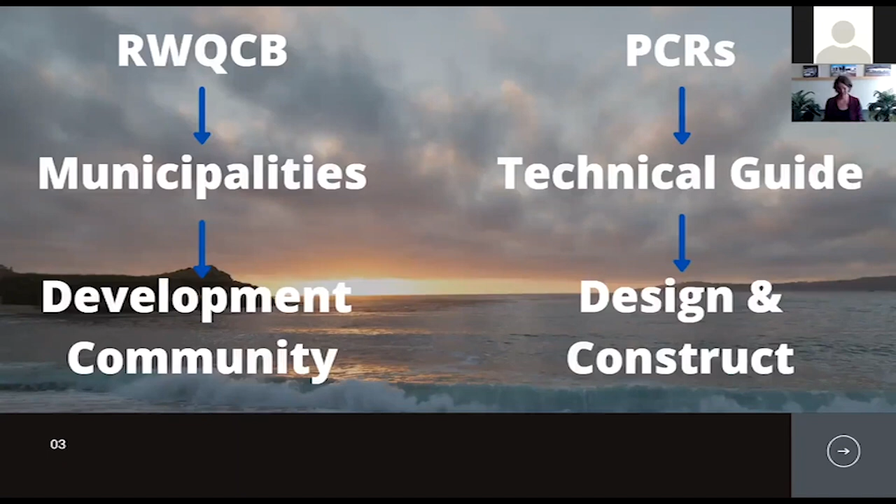So where your project is located is one of the first things you need to think about. If you are within what is called an MS4 permit boundary, that's the municipal stormwater permit boundary, within the Central Coast region, then you will be subject to the PCRs. In general, the MS4 permit boundaries follow urbanized areas as identified through the census. So if you are within city limits, you're very likely to be within an MS4 permit boundary. If you are within an urbanized area of the county, also the same. If you are within a more rural area of an unincorporated county, or if you have any likelihood that you may be outside of an MS4 permit boundary, you should definitely confirm that you are in or out.

It's also important to understand that there are other types of MS4 permit holders. Probably the one that you will encounter the most through design is Caltrans. So Caltrans is a statewide agency. They have their own MS4 permit that applies statewide. Within their right-of-way, their MS4 permit boundary, they have a separate set of post-construction requirements that they have adopted through their individual stormwater permit. So as an example, I worked on a project that was both within and outside of the Caltrans right-of-way. In that situation, you would be applying the Caltrans post-construction requirements within their MS4 limits, their right-of-way, and then you would be applying the local municipality's Central Coast PCRs within their MS4 permit. So it's important to understand where those limits are.

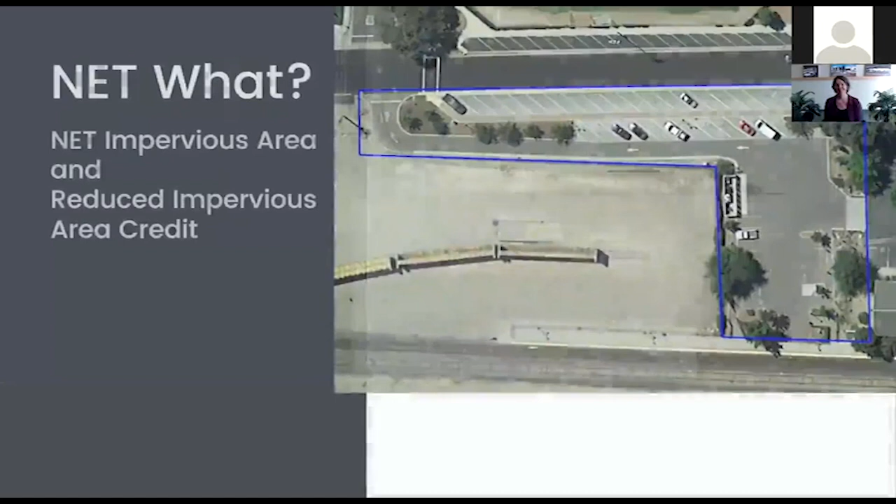So what is net impervious area? The concept of net impervious area, and correspondingly a reduced impervious area credit, was developed by the regional board as an incentive for redevelopment projects to reduce the amount of impervious surface. Meaning that if you had a site that was, say, fully paved, lot line to lot line, and you reduce that impervious surface through your redevelopment, you would then achieve a credit. So how does this work?

On the screen is an example of a site where we did just this. This was a smaller project. It was a city-owned parking lot, and it was really important for the city to maximize the amount of parking spaces on this lot because it's adjacent to an Amtrak train station, and on the other side of the street is also a ball field, and they get a lot of parking during games. So the city needed to maximize parking, but they also wanted to minimize their effort in compliance with the PCRs.

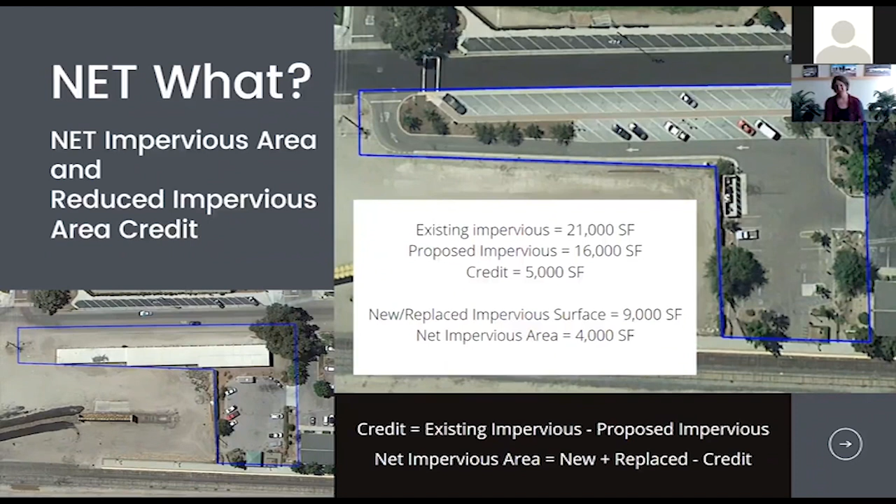We're not expecting that the preliminary stormwater control plan would provide construction-level details for every facility. But you need to show that you have enough room on your project site to comply. And certainly work with your permitting agency to confirm that the amount of information, the level of detail in your preliminary stormwater control plan, is adequate. Now, when you're in final engineering and going for your building permit, you will submit a final stormwater control plan. The final stormwater control plan needs to include detailed calculations for every stormwater facility on your project site. And most importantly, it needs to correspond to your construction documents.

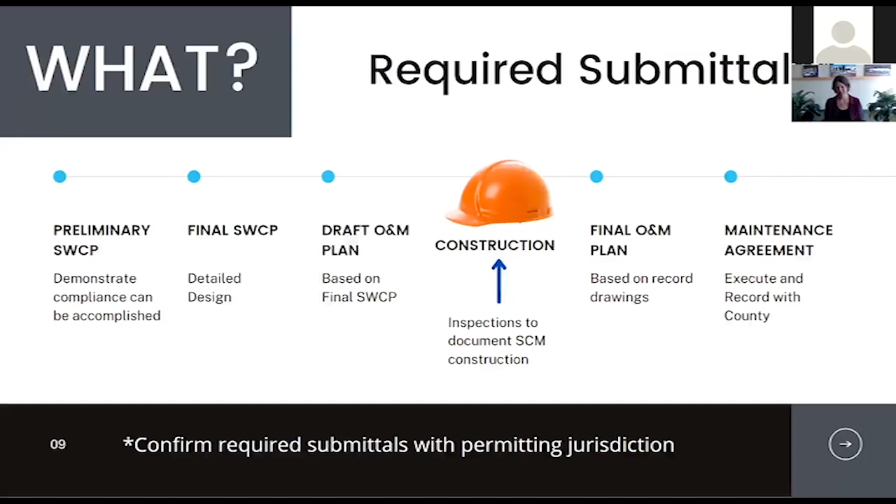So let's talk a little bit more about the O&M plan and the maintenance agreement, because this is definitely an area where the permitting agencies are seeing some discrepancies of what's required versus what is submitted. So first off is that certification of construction by the engineer of record, and that's the inspection during construction that I had talked about.

Your final O&M plan, again, is based on your record drawings. And the PCRs identify 3 minimum components that your O&M plan needs to include. First off is your O&M procedures. What, when, and how are you going to maintain your stormwater measures? And you also need to include the anticipated cost, the annual cost for this O&M. And you need to include a site plan.

Now, the final O&M plan is going to be an attachment to your maintenance agreement. Remember, that's your legal agreement. And that full package, your maintenance agreement and your final O&M plan, is going to be recorded with your county assessor. So the county assessor has specific requirements of documents that need to be recorded. They need to be able to be duplicated with a common printer, and they need to be black and white. So in general, you want all of your pages to be 8.5 by 11.

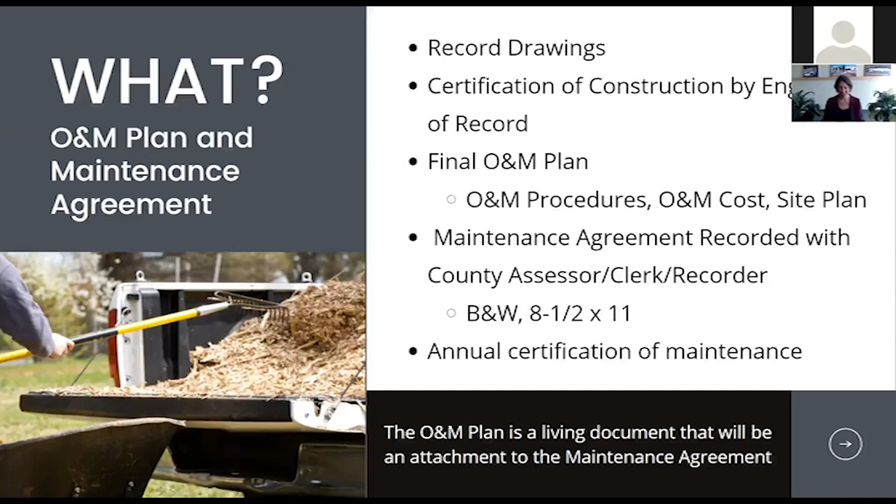So now we're going to talk about how to comply with the PCRs. This is where we'll spend the bulk of our time today, and this is also where we'll be answering some questions that have already been submitted by attendees of today's training. So thank you to those who submitted questions in advance. And again, we will be reserving a good chunk of time at the end for Q&A.

So the most important thing you can do for a successful submittal is to follow the technical guide. So thinking back to our hierarchy, the technical guide was developed by the municipalities as a tool for project applicants. The technical guide is intended to streamline your process of design and submittal, and it also helps to streamline the plan check process on the municipality side. So when you're following the technical guide, when you're using the templates, they know what to expect when they're doing a plan review. And this is going to save you time and money in the long run.

Now, I have to stop and give some kudos to Santa Barbara County. So today, specifically, I'm talking about edits to the technical guide for the MRSWMP group. But the technical guide was originally developed by Santa Barbara County. So this is very similar to what you will see used in Santa Barbara County, and I know that also some municipalities in San Luis Obispo County use this as well. So Kathleen Garnand successfully obtained some grant funding and put together this technical guide a number of years ago with the intention of it being used region-wide, and that's what we're doing now. But keep in mind that the specific changes I'm talking about today apply to the MRSWMP

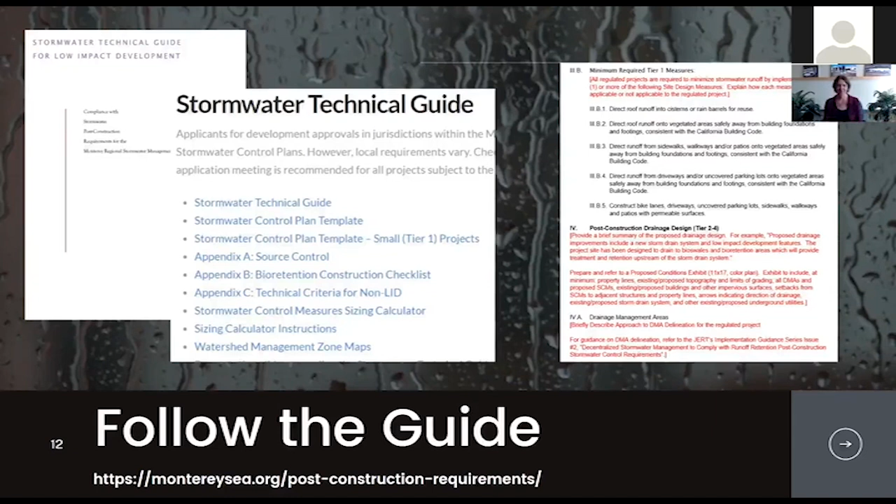One of the other important things that comes along with the guide is a stormwater calculator. So the calculator is an Excel-based spreadsheet, and it will prepare all the calculations you need for Tier 2, that's on-site treatment, and Tier 3, on-site retention. The calculator is based on a bioretention facility. It was designed and developed to calculate volumes for bioretention. It can be used for other types of features, but you may need to adjust or tweak those results a little bit. And if you are designing a flow-through facility, such as a bioswale, you will need to use some other type of calculation or program.

This calculator is based on on-site retention. A couple important things to note is that the calculator does require that you input your project areas by surface type, meaning is it an impervious surface, is it a landscape surface? And so when you're first identifying your drainage areas, you want to try to delineate those by surface type so that you have that ready when you go back to use this calculator.

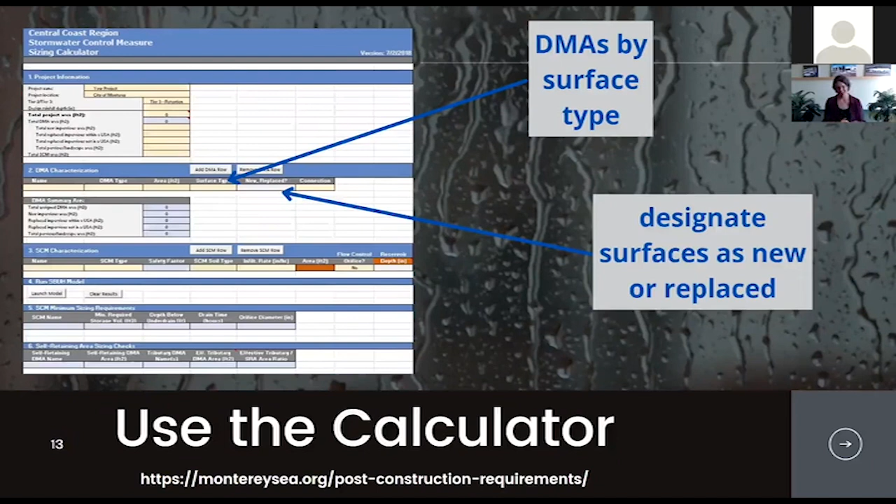The other thing to think about up front is that the calculator requires you to input values, input surfaces, describe them as either new or replaced. And this is important because if you have a replaced surface, the requirements are slightly different than if you have a brand new impervious surface. And again, there have been previous workshops that go into detail on how to use this calculator, and so I'm not doing that today. And there is also a guidance manual on how to use the calculator that's available on MRSWMP's website.

So why is it important to identify surfaces as new or replaced? Well, the PCRs include an adjustment factor for replaced impervious surfaces. And this was meant to help redevelopment projects, knowing that it will likely be more challenging to comply with on-site retention on a redevelopment site, particularly if you're in a built-out area. So that adjustment factor applies for PR3 on-site retention only. And what it is you take your sum of your replaced impervious surfaces and you multiply those by 0.5. You're cutting it down to 1/2.

And that results in 1/2 of the volume that you need to retain for the runoff from those replaced impervious surfaces. And the calculator automatically applies that 0.5 multiplier when you designate a surface as replaced. That's important to understand. You want to put in the full area of your replaced impervious surface. The calculator will apply the 0.5 multiplier for you.

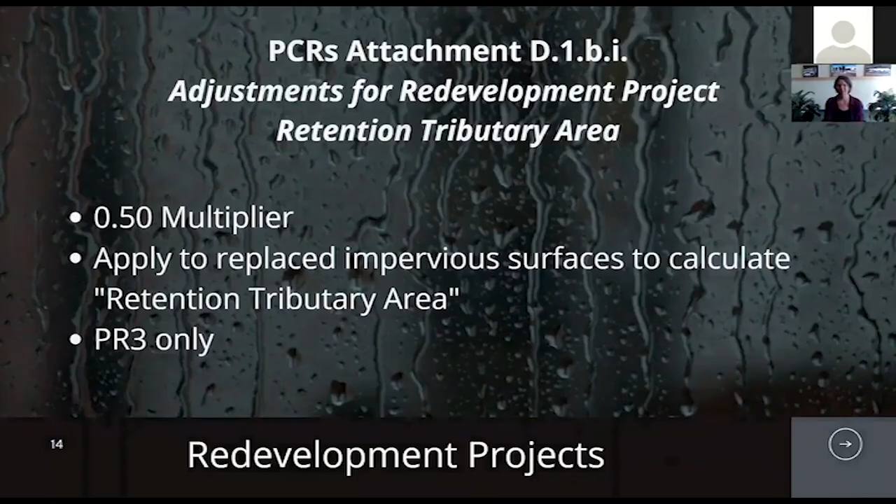Another consideration is how you are going to comply with flood control requirements. This could be the peak flow management of matching 2 through 10 of the PCRs, or you could have flood control requirements from your permitting agency in addition to the PCRs that apply on your project site. If you can use your LID facilities for flood control, it is going to help you comply.

So what you're seeing on the screen is an example of a commercial project, and everything that's shown in the colored DMAs is all new impervious surface. Generally with commercial industrial projects, you have a lot of lot coverage. And what you're seeing in green are the areas that we had available for LID. Each of these green areas were relatively shallow LID basins. It can be a real challenge to meet flood control requirements with shallow, smaller, separate basins.

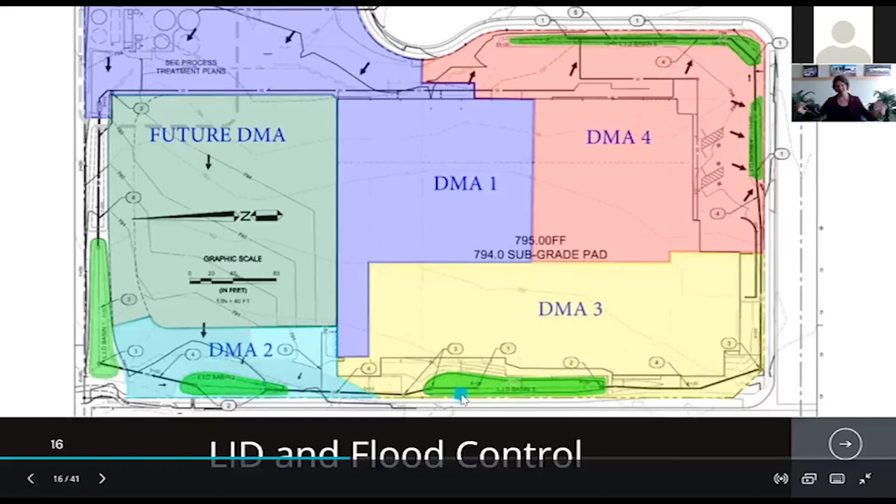And so what we did for this particular project is we connected all of these basins with a storm drain system, so now they act in series. It works well because this site is relatively flat. Everything drains through this basin here, and for flood control purposes, the flow is metered out through this basin. Water can then back up through these storm drain systems and start to fill out these upstream basins. We were also able to take credit for the volume available in those 18-inch storm drain pipes. It's not huge, but it's something. Together, between these discrete basins and our storm drain system, we were able to meet our peak flow management requirements using just our LID facilities.

Now, I'm going to start talking about some specific design features for post-construction compliance. Bioretention is, in general, one of the most commonly used features for compliance. It is what the technical guide will direct you to as a first measure if you need a structural stormwater control measure, and it's also what the calculator is based on. Part of the reason is that bioretention is really reliable.

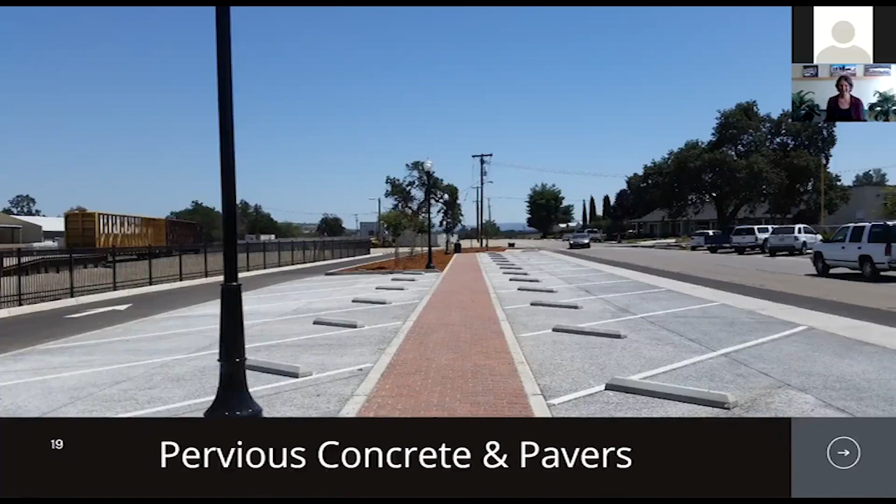This project happens to be the project I used as an example for net impervious area, the parking lot redevelopment project. So all the stalls here were pervious concrete and the walkways were pervious pavers.

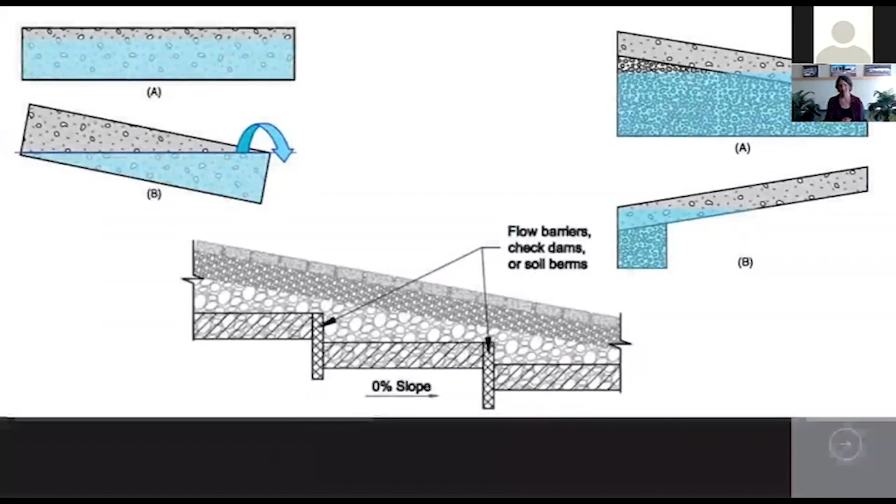So one challenge with pavers and concrete is that in general, our sites are never perfectly flat. If your site is perfectly flat and filled up like a bathtub, you could account for all of that retention volume in your aggregate below your pavers or concrete. Generally, that is not the case. We are going to have some type of slope, and you need to account for this in terms of how much water you can store below those pavers.

So the graphic over on the far right shows a couple options for doing this. You can extend the depth of your base to account for that slope and achieve more retention. If you have a highly sloping site, you could even consider just capturing everything on the downhill side of your pervious concrete if that works for your retention volume.

Another thing to keep in mind is that you may need to include some subsurface check dams. Maybe these are highly compacted native soils. Maybe it's concrete. But you need to ensure the stability of that subgrade as you're storing water below your pervious concrete.

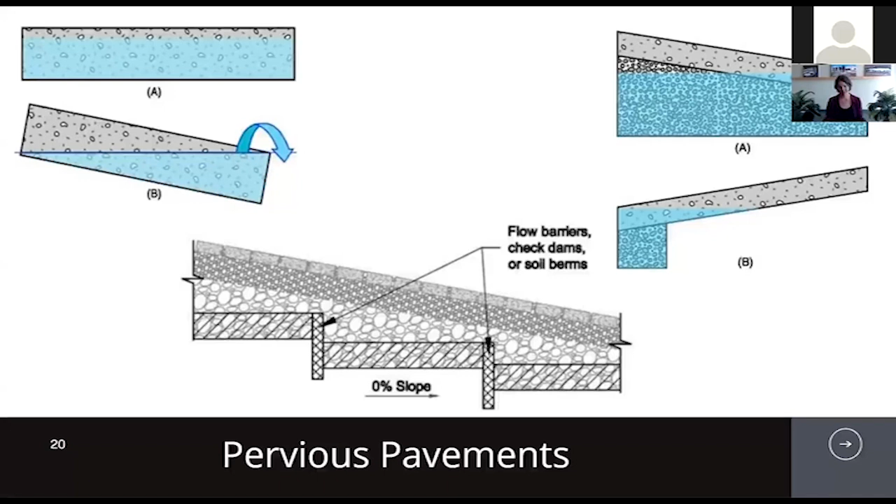That spacing is really critical because ADA requirements dictate the maximum allowable spacing for pavers to be an ADA compliant surface. If your contractor places these pavers such that that spacing is exceeded, now your surface is no longer ADA compliant. So this is really important to have a tight spec and to check in the field. When you're working with pavers, you generally have some more resources available from the manufacturer. So make sure to get all of the manufacturer's recommended specs for both design and construction.

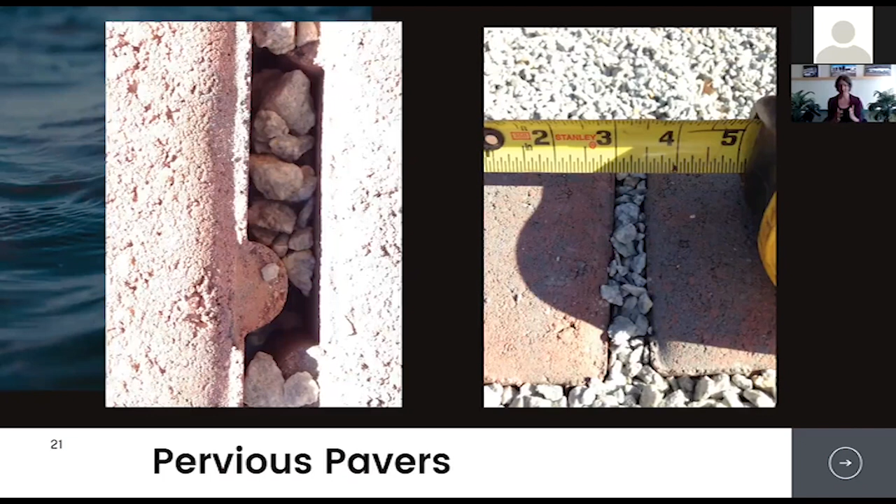Now these pavers again rely on the rock and the area between the pavers to allow for infiltration. And here's an example of what that rock might look like immediately following construction. So it is a challenge to get that aggregate placed into the linear voids between those pavers. And you need to anticipate that there's going to be some maintenance work immediately following construction. You are going to have to clean up that rock following construction and throughout the life of the project. So these types of pavers may need rock to be replaced over time.

If that rock was clogged with, say, sediment, if you had a flood flow that came over and placed mud in those areas, you may have to even go back and vacuum it all out and replace that rock. So this particular material is not a set it and forget it material.

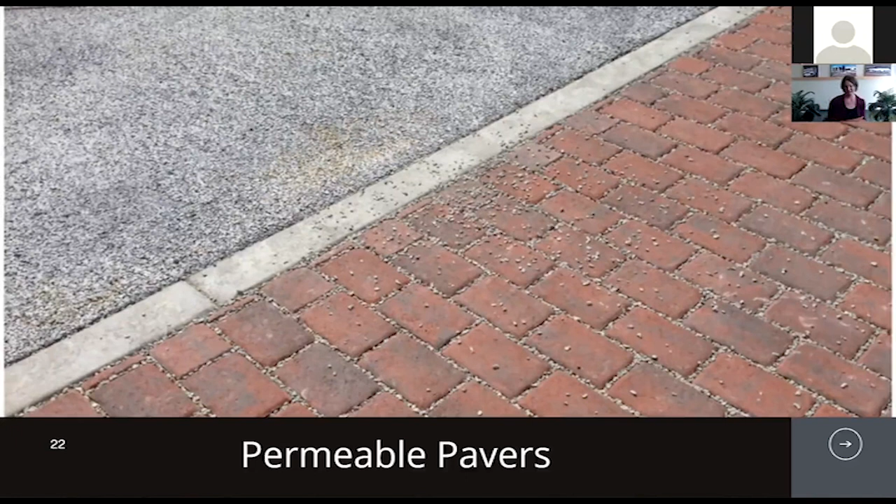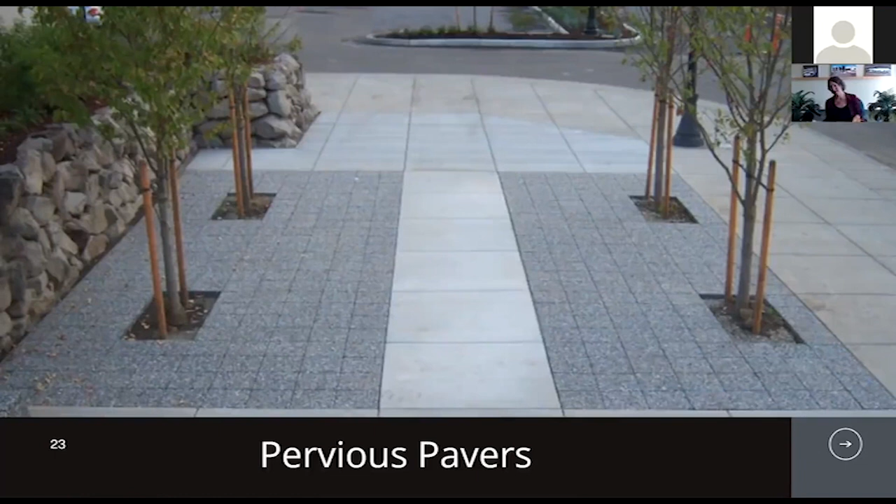So there's no gap between the pavers because, again, the material itself is pervious. And so what you are constructing is a contiguous surface of pervious pavement using a unit block. These are generally a little more expensive up front, but they will very likely minimize your O&M costs in the duration. And they also minimize the chance that something is going to happen during construction.

So this is our first question that came through from one of our attendees today. And the question is, what surfaces are considered pervious or impervious for threshold calculations? So keep in mind the tier that your project is in is dependent on your amount of impervious surface. So understanding up front what is classified as what is really important so that you correctly identify your tier.

The takeaway for this is, is it going to significantly change conditions from pre-development to post-development? And if you have any question on what is considered pervious or impervious, again, please work closely with your permitting agency. The permitting agency is the final authority in terms of approving your stormwater control plan.

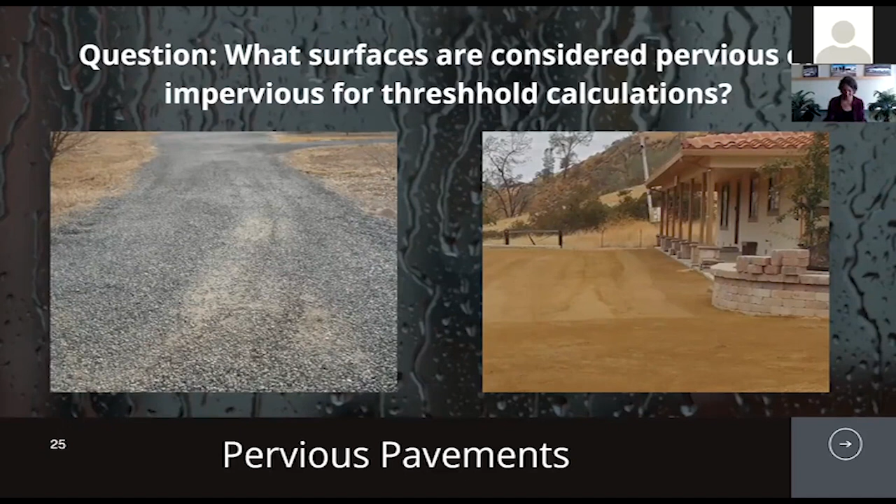So if you submit a stormwater control plan and you get a long laundry list of comments related to things like this, what is pervious, what is impervious, you need to add more detail to your bioretention, whatever it may be, I understand that it's a challenge to comply with these requirements. The permitting agency is really needing to follow the letter of the law because of that potential for an audit, for an NOV. So keep that in mind, right? As you are preparing your stormwater control plan, the PCRs are the regulation. The technical guide helps to get you there. And at the end of the day, it's the permitting agency that's going to be on the hook for that implementation, for that compliance.

All right, so we are going to talk for a while today on infiltration. So infiltration is really, I'll say, a cornerstone of design when you have to account for on-site retention. And I have seen a lot of questions. I have had a lot of questions over the years of implementation.

And, you know, one thing to note in general regarding the technical guide, regarding the PCRs, is that guidance is evolving as we learn more, right? As we construct and place these types of facilities in the ground and observe their performance, we have lessons learned. We have lessons learned through construction. And so a lot of the updates that are coming through the technical guide are based on those lessons learned over the past few years. And certainly we've learned some things about infiltration also.

So the question here is really multiple parts: can you provide some guidance on testing for a surface stormwater control measure, or SCM, as compared to a subsurface stormwater control measure? How do we interpret the test results that we receive from a geotech? What are some factors of safety that we should be considering? How do we manage multiple infiltration rates that were tested on the same site? And are there resources available for when on-site testing is not performed?

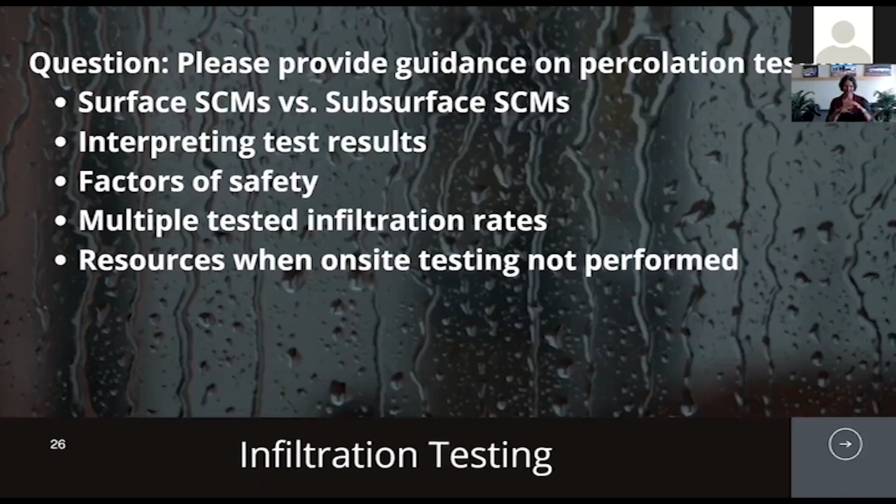So first off, I want to talk about the difference between percolation and infiltration because it's important to understand. Infiltration is the movement of water into the soil. If you have a puddle of water on the ground, it is infiltrating into that soil surface. Percolation is the movement of water through the soil profile. So percolation can occur both horizontally and vertically in all directions once that water is now into the soil profile. The most common type of test that's done in our region is a percolation test.

And Earth Systems did a good job of putting together some guidance on infiltration testing. And it looks something like what's shown here on the screen. This isn't exactly it, but it's close enough for discussion. So when Earth Systems started out in developing this guidance, their goal was to come up with a testing method that could be done utilizing standard equipment that they would generally have for a typical geotechnical on-site study, and also something that wasn't going to take a whole lot of additional time. And what they came up with was a recommendation for a percolation style test.

And what this is, it's a geotechnical boring, and these borings would be conducted across the project site. And a few of those borings would be selected for testing. And the testing would be to place a perforated pipe into that boring, fill that annular space with gravel, now add water until you saturate the soils. And once your soils are saturated, you monitor how quickly that water is dropping, right? What is the rate of drop in that hole? This is a percolation test in that you are subgrade, you're within the soil profile, and you also have water moving in all directions. You have water moving horizontally, you have water moving vertically.

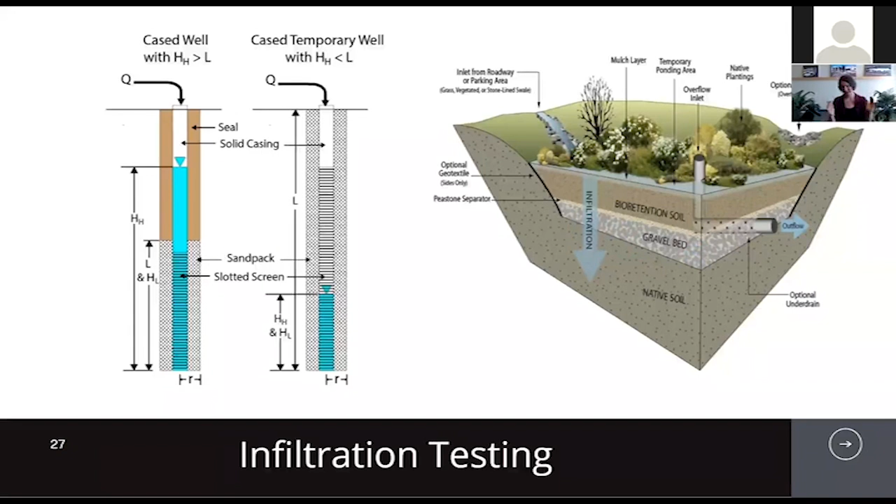Compare that to a typical bioretention. Certainly in our area where we're relying on this gravel bed, this subgrade storage, this is more of a percolation type condition. You're already in that soil profile. However, your typical bioretention facility has much more horizontal area than it does actually vertical sidewalls. So let's take a look at an example of this.

So a typical diameter for a borehole would be 6 inches. And let's say we have 3 feet of standing water in that borehole as your geotech is testing those infiltration rates. You have a sidewall to base ratio of 24, meaning the area available for percolation around the exterior of your borehole is 24 times the area along that 6-inch diameter base.

Now, Earth Systems defined a small-scale stormwater control measure in their guidance. They state that their guidance is intended for use in a small-scale SCM, meaning an SCM where the sidewall percolation provides a significant component of infiltration relative to the bottom of the SCM. So they recognize that this guidance really provides a testing method that would correspond to something like an infiltration trench, something linear in nature, something that relies on likely underground storage through gravel, something that has a lot of sidewall area.

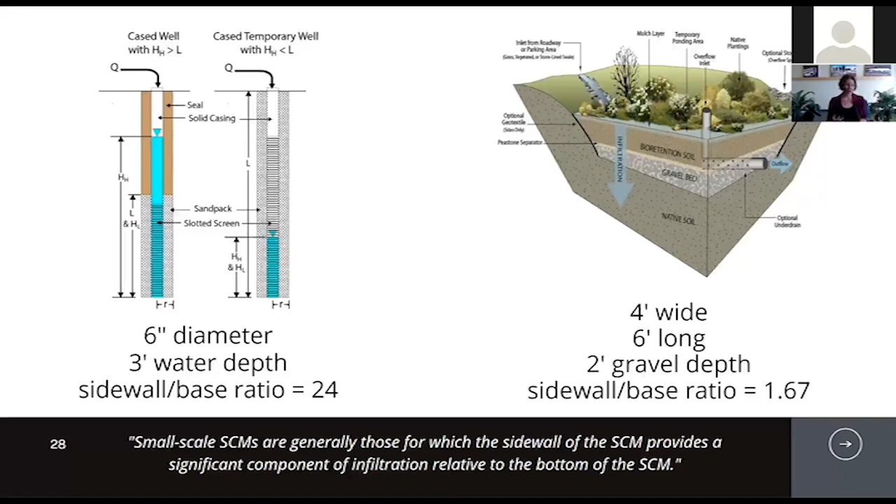So even in the same borehole, in the exact same location, on the same day, you could have different results depending upon how much water you had in that borehole. So what do we do? All is not lost. This is still a completely valid method of testing, but we need to account for this sidewall area through what's called the Porchet method.

So the Porchet method is described in multiple resources. I think the best one that does it is the Riverside County Manual, and there's a reference to that at the end of this presentation. It's also cited in a number of other manuals. The City of Santa Barbara Manual cites it, the San Diego County Manual cites it, the Orange County Manual cites it. What the Porchet method does is it accounts for all of your surface area available for percolation.

It might look like fancy math. At the end of the day, it's just taking into account the height of your standing water, the surface area of your borehole, and basically resulting in what you could consider a unit infiltration rate. And that is the design infiltration rate that you would then apply to your bioretention design. So if you're using a computer program, if you're using the Excel calculator, that calculator is assuming that that infiltration rate occurs over this full surface of your bioretention facility.

If you apply directly your results from a percolation type test, you would be vastly overestimating what could occur here because of that percolation area available in a percolation type test. So this is a very important step. It can result in a significant reduction in a design infiltration rate compared to what's tested. I mean, on the order of magnitude of 10 or more. I've seen 20, I've seen 30 times reduction in what is an appropriate design infiltration rate compared to a percolation type test.

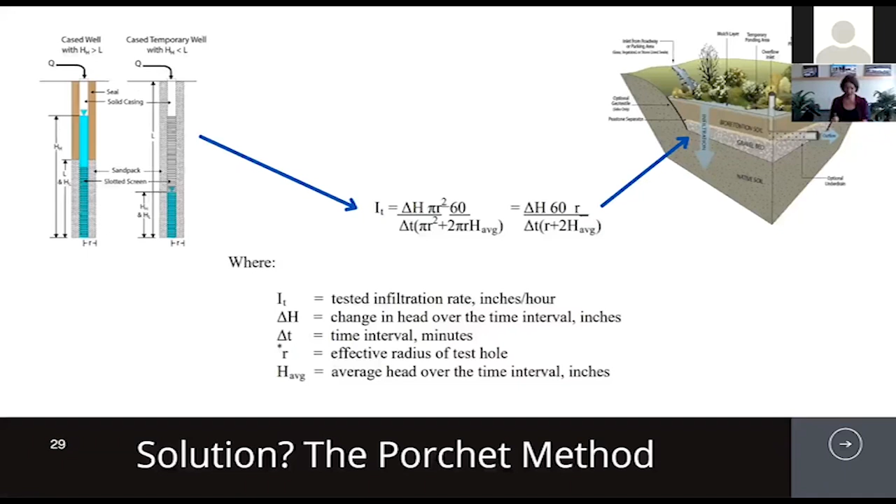Now, an alternative method of testing is a double ring infiltrometer. So the reason why Earth Systems steered away from the double ring infiltrometer is because it takes special equipment and it takes more time. So all of this is not to say that the percolation testing is not appropriate or not preferred. Certainly it meets the goal of using standard equipment, minimizing time and cost. But you, as the designer, need to understand what you're working with.

Now, looking at this example on the screen of a double ring infiltrometer, what this does is it tests surface infiltration rates. The outer ring remains saturated, and what that does is it limits the movement of water from that inner ring to strictly just the vertical direction. So the double ring infiltrometer is really good at estimating surface infiltration rates for facilities that do not have a lot of sidewall percolation. An example would be any standard detention basin.

Once you have a large basin with a shallow depth of ponding, and keep in mind that for these water quality storms, the 85th and 95th percentile storms, we're talking about really shallow ponding. Your sidewall component is basically negligible. Now, looking at the picture on the right, this is an infiltration swale. So there is no subsurface storage in this facility. If you are designing a facility that relies on surface infiltration, it is my opinion that you will get a much better approximation of what you will actually achieve on site through something such as the double ring infiltrometer.

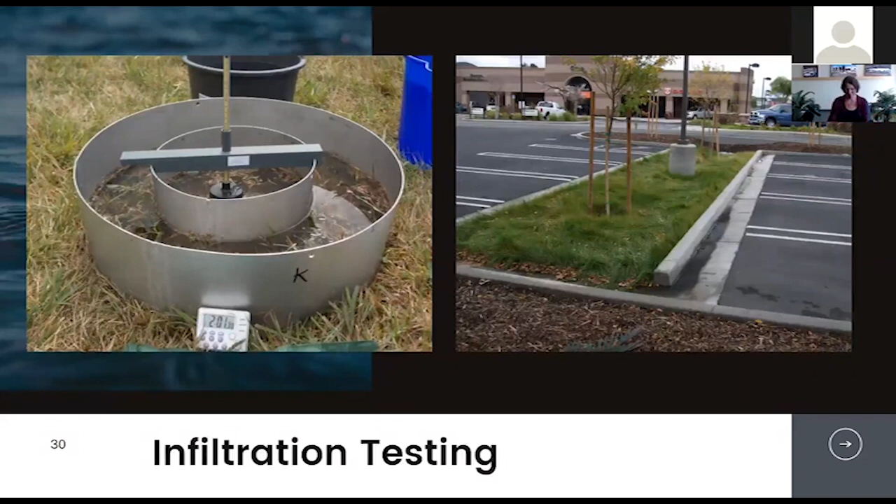Now, one of the questions was, what do I do if I don't have on-site testing? So again, let's thank Santa Barbara County. Santa Barbara County was working with a consultant, Dan Cloak, who is an engineer up in the Bay Area. In the Bay Area, they have been constructing bioretention facilities much longer than we have here on the Central Coast.

And Dan Cloak really wanted to answer this question because he understood that it was a burden to have to test infiltration rates, right? There's uncertainty in terms of varying soil profiles, in terms of how the test was conducted, in terms of applying safety factors, right? There's a lot of question and potential uncertainty, room for error when it comes to on-site infiltration testing. And he saw that burden and he wanted to try to minimize that.

And through his work, Dan Cloak and a group of other engineers had studied constructed bioretention facilities in various soil conditions. So they were measuring rainfall rates, they were measuring rainfall depths, they were measuring the amount of water that was coming through these facilities on the outlet side. And through that study, my understanding is how they developed these recommended infiltration rates that are built within the calculator.

These infiltration rates are dependent on your hydrologic soil group as defined by NRCS. So within the calculator, if you choose a hydrologic soil group A or B, the calculator will assign an infiltration rate of 0.75 inches per hour. If you choose a hydrologic soil group C or D, the calculator will assign 0.25 inches per hour. Specifically, that 0.25 inches per hour for a hard clay soil is likely more than you would see if you were doing a percolation type testing.

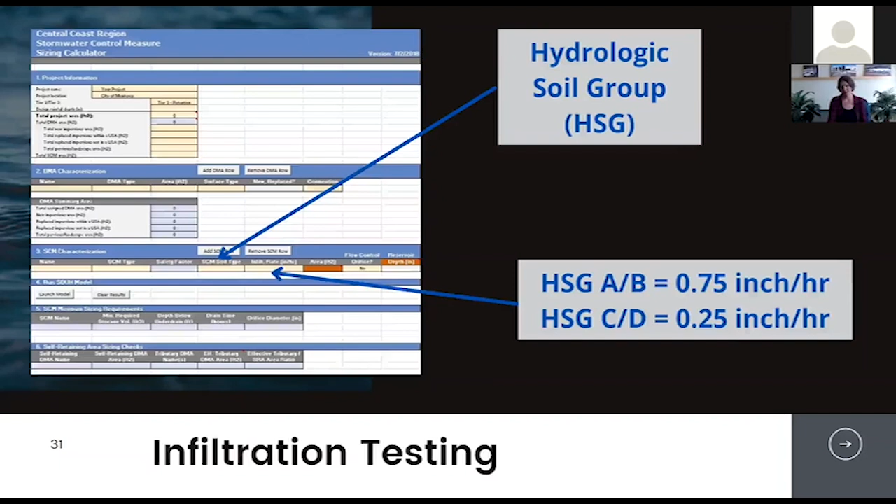And really this is because this is based on a field observation of a heavily vegetated bioretention facility constructed and in good condition. And so this standard rate of 0.25 inches per hour is giving you that benefit of the interaction between the soil and the vegetation, right? Instead of having to go out and do your double ring infiltrometer to see that, hey, yeah, I actually get more infiltration than I think I may, this rate is reasonable, it's field tested, and it accounts for that benefit of being heavily vegetated. In the absence of on-site data, or if you feel like this value is more appropriate than your tested on-site data because you will have vegetated facilities, these values are standard in the calculator and you can certainly use them.

So let's talk about safety factors. The calculator has two built-in safety factors. The first safety factor is for a bioretention facility. And that safety factor is 1, meaning there is no safety factor. So why is that? Well, two reasons. The standard infiltration rate for design, the 0.25 and 0.75 inches per hour, is based on ground observation. Constructed facilities, right, we've already removed a lot of the unknowns. Second is that bioretention is required to have long-term operations and maintenance that maintain that infiltration rate over time.

So by design, a bioretention facility has a layer of mulch that is intended to capture fines, debris, vegetation, trash. And that mulch should be removed and replaced. So by replacing that mulch, maintaining your surface infiltration, maintaining really the functionality of your bioretention system, you are given this credit, meaning you do not need to apply additional safety factors if you're using bioretention. Now, if you choose what's called in the calculator direct infiltration, now you have a safety factor of 2. And this would be any other type of facility that doesn't have that built-in functionality of removing all those fines and debris that could otherwise decrease your infiltration over time.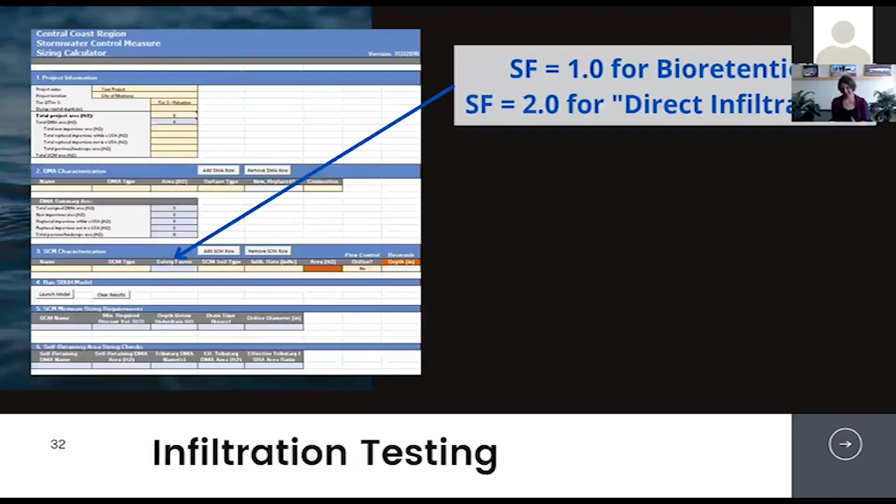So that wraps up the discussion on infiltration. And now we're going to move on and start talking about some technical infeasibility. So one of the questions that came in is, my site has high groundwater, less than 10 feet. My site also has very poor infiltration. How can I achieve PR3?

So the PCRs has what's referred to as technical infeasibility, which identifies a number of various conditions on your site through which on-site infiltration may not be feasible. Both high groundwater and poor infiltration are on this list. So if you indeed had both of these conditions, I would say this meets the criteria for technical infeasibility. Again, make sure to confirm with your permitting agency that they agree that your site meets this infeasibility criteria before you go down the path of complying in this manner.

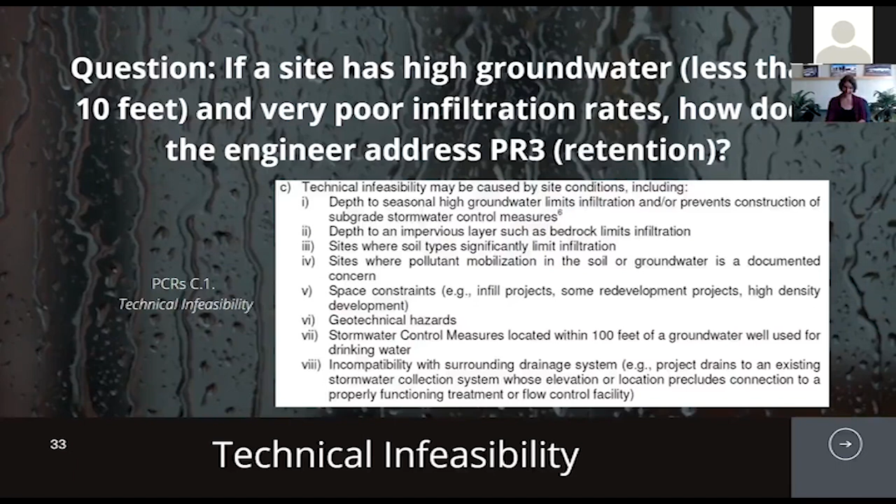So I have confirmed that my site does indeed fall under that category of technical infeasibility. What does that mean? Well, what that means is, let's say you're a Tier 4 project, you still have to meet Tiers 1, site design, 2, treatment, and 4, peak flow control as stated in the PCRs. You now have a different path of compliance for PR3, on-site retention.

So rather than calculating your runoff volume and designing your SCMs for that volume, now what you need to do is dedicate 10% of your site to what is called the equivalent impervious surface area, also defined in the PCRs. So the EISA, the equivalent impervious surface area, is the sum of all your standard impervious surfaces, roofs, concrete, asphalt, and also some pervious surfaces multiplied by a factor. Those factors are shown in Table 1.

So as an example, if you had a commercial site that was primarily impervious surface and you had some grass, some managed turf along your landscaping perimeter, then your equivalent impervious surface area is all of those impervious surfaces plus your turf multiplied by the factor shown in the table that's dependent on soil type. Now, you calculate your EISA, you take 10% of that, and now that resulting surface area, that 10%, needs to be dedicated to what the PCRs call retention-based stormwater control measures. There's no clear definition of how much volume you would need to store in those SCMs or what the design criteria is. It just needs to be retention-based.

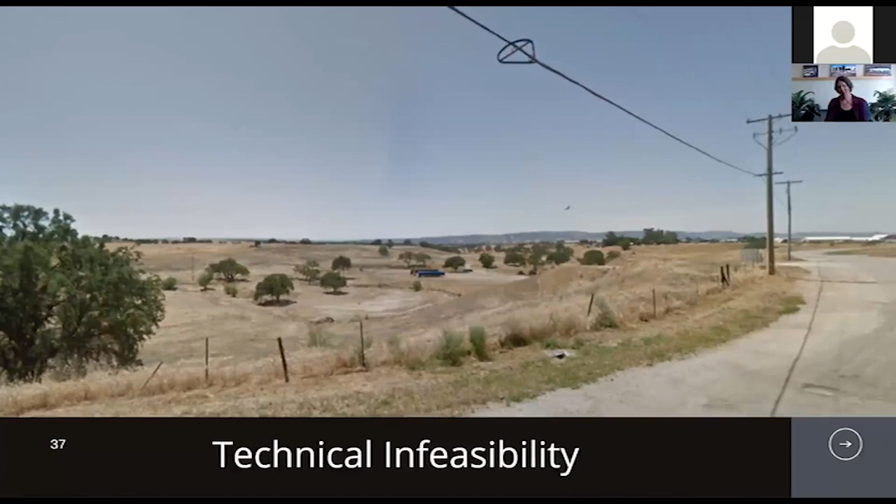Moving on from technical infeasibility, this was the last question that came in. The question was, can you please talk about Performance Requirement 5? The PCRs identify Performance Requirement 5 as what's called special circumstances. So there are some cases where the requirements may be different or scaled back if you fall under one of these categories. The categories are, first, highly altered channel, second, intermediate flow control, and third, historic lake and wetland.

Highly altered channel means that you have a channel that's hardened with concrete lining, or some other compacted lining, from your project site all the way to an outlet of a large water body. Those water bodies are defined in the PCRs, generally a lake or an ocean. As an example, a lot of Pacific Grove and Monterey may fall under this category because they do indeed discharge to the ocean, and a lot of that is through a storm drain pipe, right? Which could be considered a highly altered channel.

Now, this particular case means that you can scale back on your peak flow management. Your on-site retention and on-site treatment remain the same, but you can scale back peak flow management. The thinking is that sending peak flows through these facilities is not going to be damaging or otherwise altering a natural stream. It is up to the project applicant to demonstrate that you can safely do that within the existing facility.

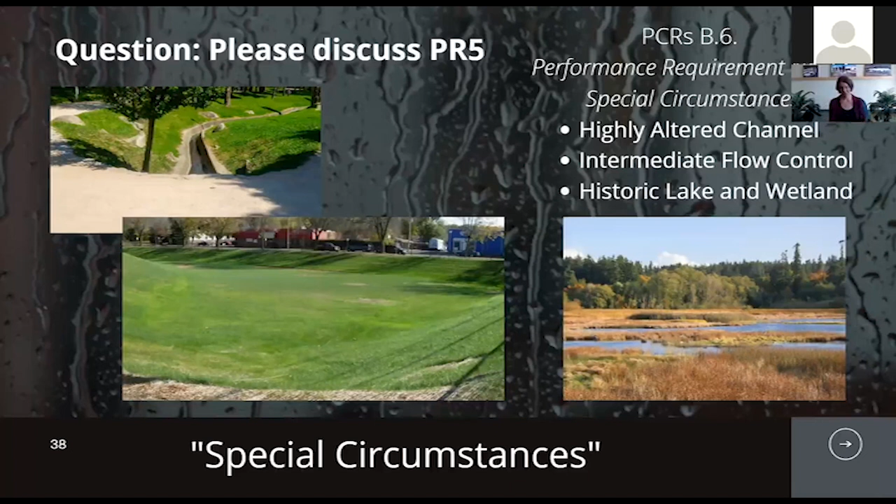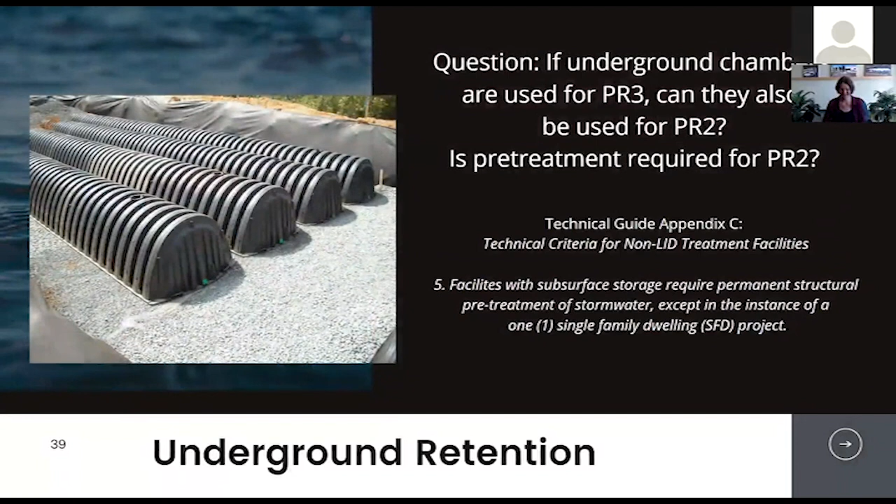This is actually the last question that came through. I stand corrected. So let's talk about underground retention. Underground retention is becoming a more common way of complying with the on-site retention requirement, in particular for those projects that are space constrained, commercial, industrial, high-density residential.

So the question was, if underground chambers are used to comply with PR3 on-site retention, can they also be used for PR2? And is pretreatment required? So, infiltration on-site is the preferred method of meeting both PR3 and PR2 according to the PCRs. PCRs outline a hierarchy of ways that you can comply. Infiltration is the #1 method. So the answer to that first part is certainly yes. If you are infiltrating water on site, you're meeting the preferred method of compliance with PR2.

Now, is pretreatment required? The long-term operations of these facilities is dependent on them, just like any other type of subsurface retention, such as the gravel layer in your bioretention. It's dependent on them maintaining that percolation over time. And so absolutely you need pretreatment, right? You need to capture upstream any sediment, any debris, any trash, anything that's going to be flowing to these facilities that could decrease that long-term percolation.

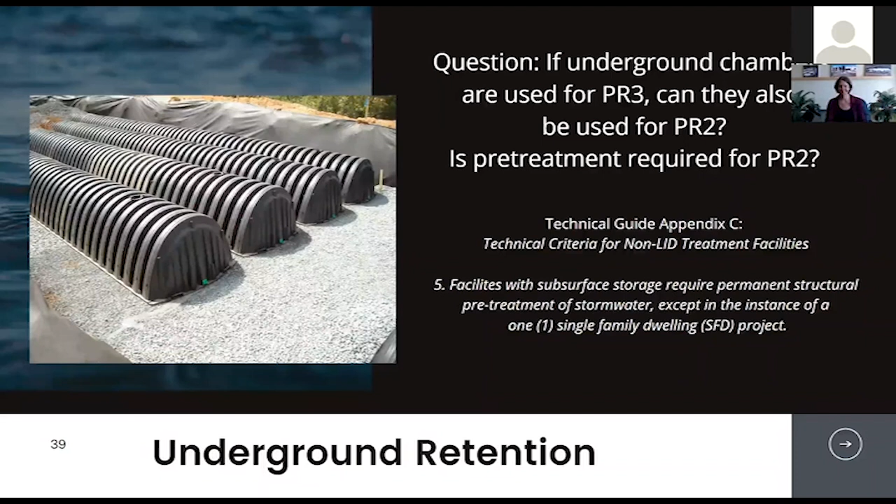And that was the final question. So, as promised, here's a list of resources, a few of my favorite things. First off is the MRSWMP website. On that website, you'll find the technical guide, all the attachments that come with it. You'll find the calculator, the instructions for the calculator. And the MRSWMP website also has references to all the infiltration guidance that I had discussed today.

The Santa Barbara County website does a really good job of outlining O&M plans and also some sample O&M agreements. Again, it's up to you to work with your permitting agency to use an O&M agreement that's compatible with their clerk recorder, with their process. The Santa Barbara County website also has pre-recorded PCR workshops. There is a series of workshops that were hosted by Santa Barbara County that go into much more detail on the basics of the PCRs, how to use the calculator, how to use the technical guide. All of that is recorded.

Another really great resource is the Central Coast LIDI, Low Impact Development Initiative. There's a number of different resources for both design and construction guidance, such as standard details, standard specs, plant lists. There's also a library of different training videos available. My favorite guideline for pervious pavement is Caltrans. They go into a really high level of detail of the different design considerations and criteria that you need to include on your plans and specs. Similarly, I think that for flow-through treatments, such as a bioswale, the Caltrans design guidance is the most complete. I would recommend going there for any vegetated flow-through facility.

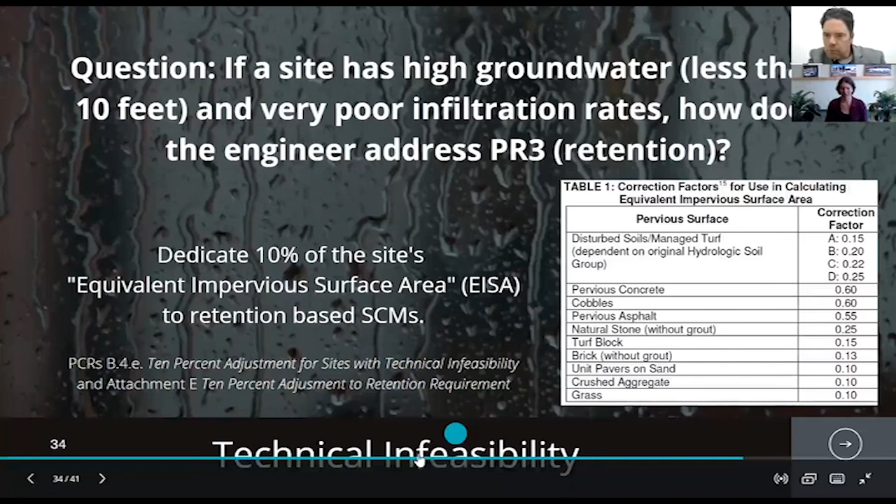For flow control in particular, these basins by themselves sometimes were not really the right shape or size for that DMA, and that's where we used the storm drain to connect the basins to add more flexibility, to have a single discharge point from the project site, and also to allow these basins to interact with each other for ponding for the 2 through 10 year storms. Any surface ponding in those LID basins was below the invert of those pipes where they were interconnected. So PR3 was met in each individual location.

For PR4, the 2 through 10 year storm, we allowed those basins to basically function as a larger facility, and we had the benefit of being able to take credit for the volume stored within our pipe system. That was part of our detention volume, the storm drain system itself.

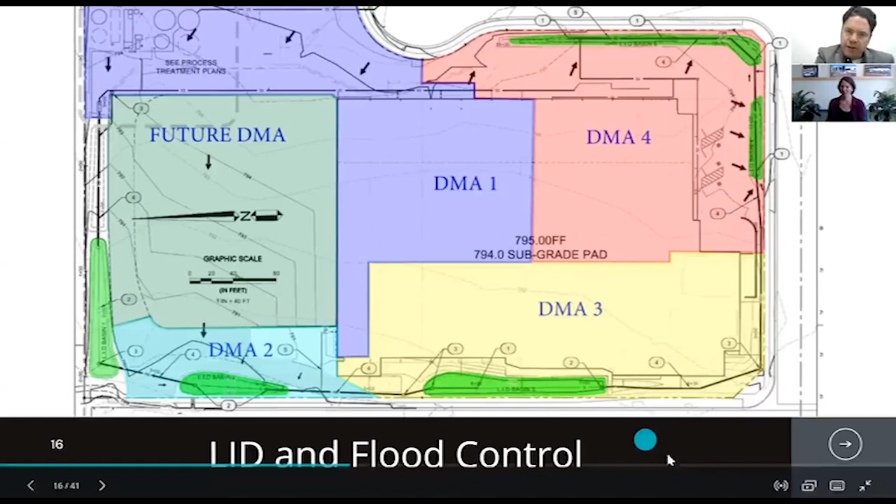Okay, we've got a question regarding slide 18. And that was whether the perforated bottom there was for outlet flow control. So the perforated pipe itself is the under drain system. So it's the same concept as this detail. This detail just shows it in a schematic format. So where you see the dashed line here in this detail, this is also a perforated pipe.

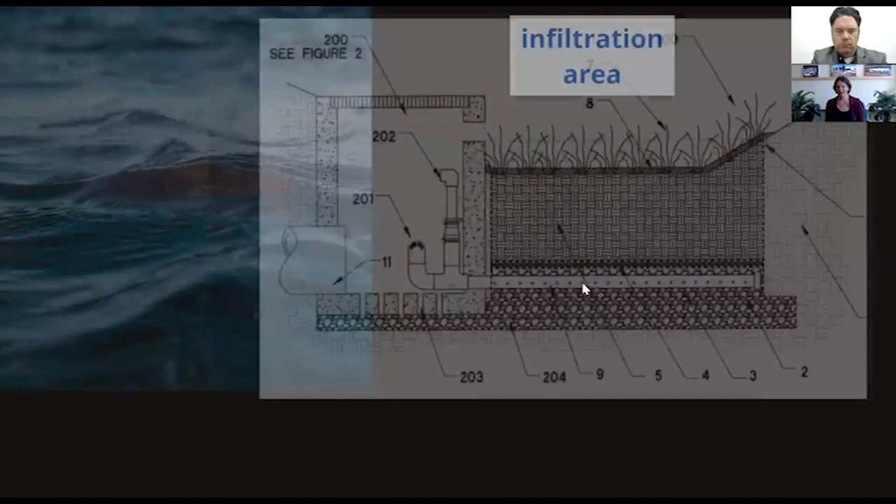And so the purpose of the perforated pipe is to capture water that would exceed the available volume within your gravel layer. So this is all the gravel layer. So once your gravel layer is filled up, now, let's say in a larger storm, you need that water to go somewhere. It's routed through your under drain and now to your storm drain system. So it's the same concept here, that the under drain captures any runoff that is basically overwhelming this facility, right? In a 95th percentile storm, you would expect, because it's designed to retain, that you may fill up to, say, this level here, and you would never overflow.

So in that case, the under drain in the 95th percentile storm really wouldn't be a functional component. It's in those larger storms where your facility is filling up that water is now being routed through your under drain and through your outlet, or in this case, through your under drain and then through your orifice.

And then we had a clarification. So he was referring to the perforations in the bottom of the DI, number 203. Oh, got it. Sorry. Okay.

Yeah. And yes, again, I'll say that this is not one of my favorite LID details, but it's a detail that I had available to really demonstrate this standpipe. But yes, the purpose of these perforations is to prevent standing water in your DI, and I have spec'd those out as well. I've also seen that this is an opportunity where if you're really site constrained, you can allow for more infiltration to occur here through your DI as well. So as an example, we have spec'd out an open bottom DI that allows for infiltration. So really, what you're seeing there would just be a measure to try to prevent nuisance water from building up in your DI.

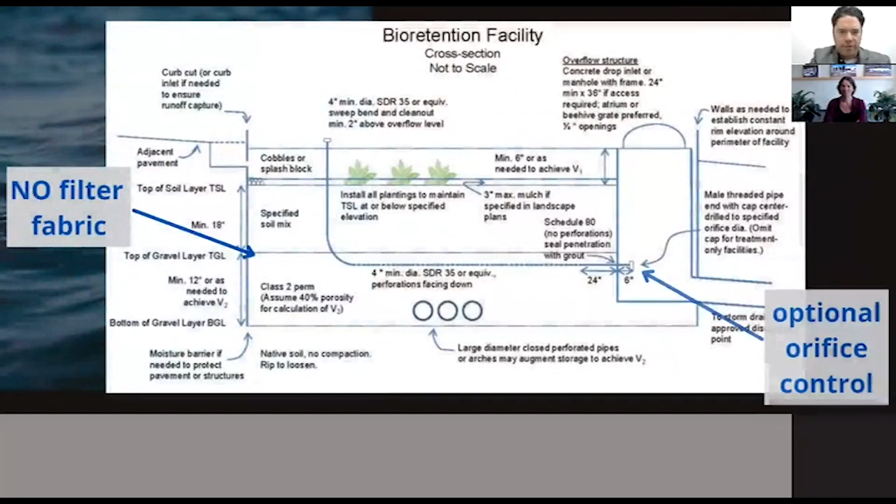Thank you for that clarification. Does the reduced impervious area credit only apply to determining net impervious area in the PCR category? Or do we also subtract it when determining retention tributary area for retention volume calcs calculations?

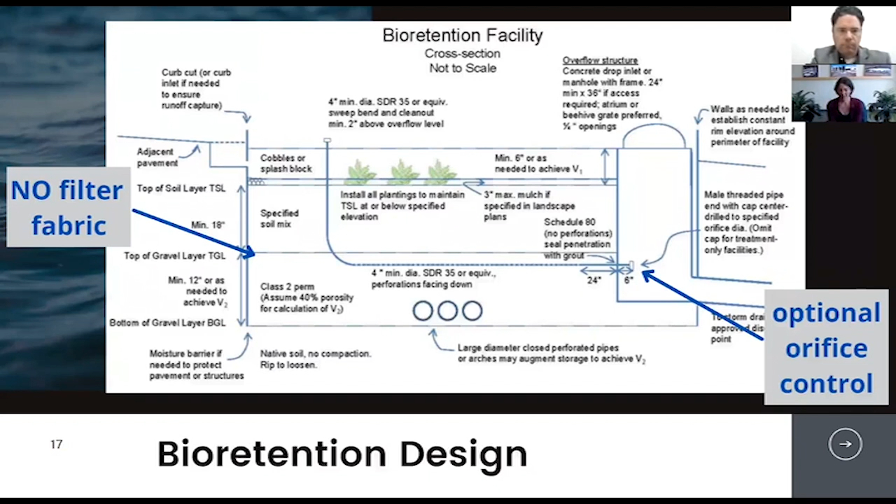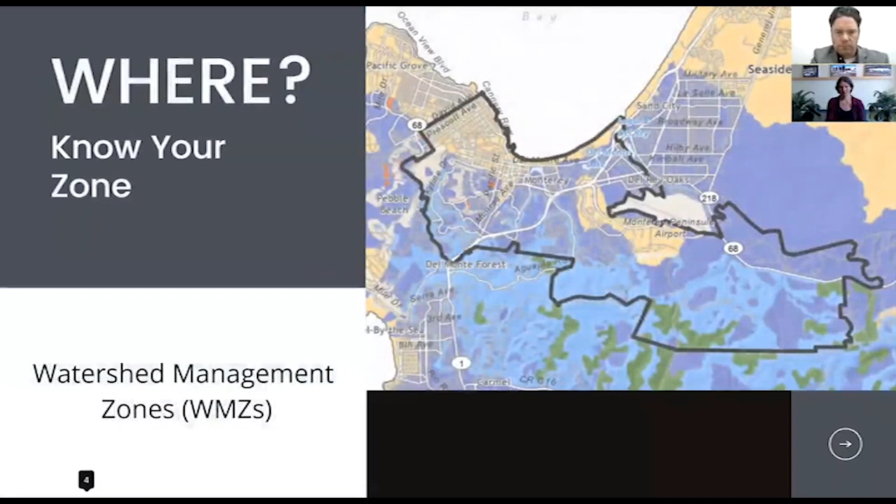Yeah, that's also a really good clarification. So let's go all the way back to the very beginning. So this table will hopefully help answer that question, that net impervious area applies only for water quality treatment. So in your calculation of the tier that your project is in is where you use net impervious area. You also use net impervious area to calculate your tier for retention if you are under the category of one single family home. So the net impervious is used to calculate your tier only.

Once you identify what tier you are in, you use the total of your new and replaced impervious surface to calculate your treatment requirement or your retention requirement. Now, to make it even more complex, when we are talking about the replaced impervious surface, that's a separate multiplier. That's the 0.5 multiplier that we talked about that is accounted for in the calculator when you designate a surface as replaced. So to try to summarize, net applies to your tier designation. It does not apply to how you calculate your tributary area or your water quality flow rate.

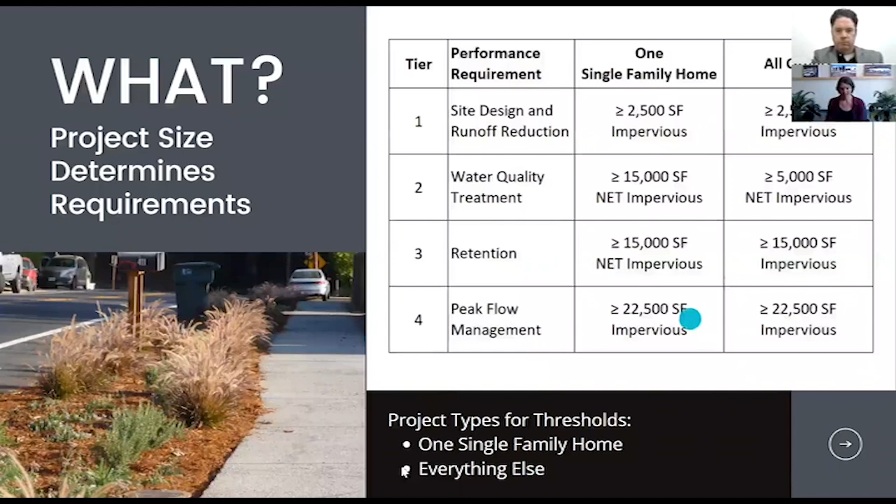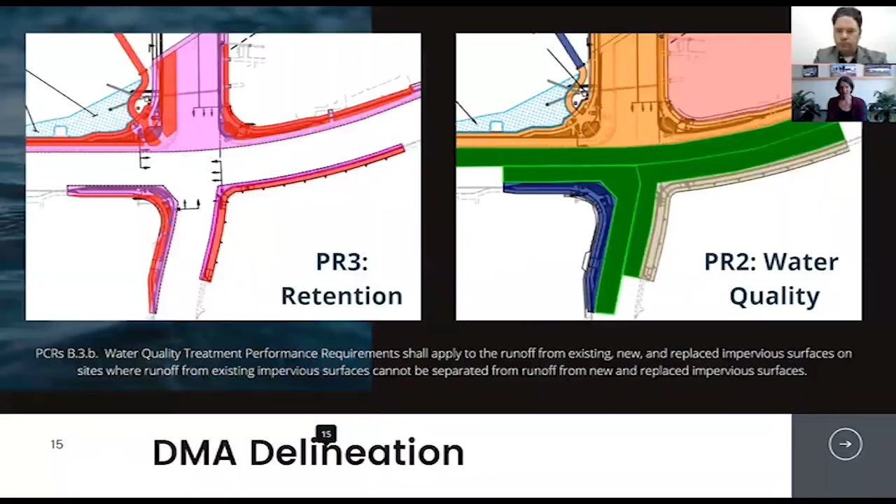Is it critical to always place BSM and rock under the slope sides of a bioretention basin if these sides aren't considered part of the infiltration area or included in the basin volume calculations? Yeah, so let's look at that detail again. And again, this is the detail that I wouldn't necessarily use for construction, but I wanted to use it for discussion. So this detail shows the BSM extending up the slope.

I would recommend not doing this for two reasons. Because as the question stated, we're only accounting for this flat area that fills up like a bathtub for our effective infiltration area. This is where you're really taking credit for that bioretention media. So why bring in this expensive material if you don't need it for compliance?

And the bigger issue that I see with the way that this is drawn here is that this material is much more highly susceptible to erosion than a typical native soil. So here again, if you did have bioretention media extending up a slope, anywhere where you have concentrated flows or suspect that flows are going to be coming into your facility, you should be protecting from erosion. You should have rock here to protect from eroding this portion of the slope.

My preference would be to extend this native soil all the way down to the base of the bioretention facility, because in general, native soil is going to be more stable, more compactable than a bioretention media. So that can help minimize that erosion. There may be some need for the health of your plants to incorporate some compost or do something else here to the native soil to promote the vegetation growth in your facility, but I would recommend that is not BSM. Whether or not you extend the gravel beyond that is really dependent on your site constraints.